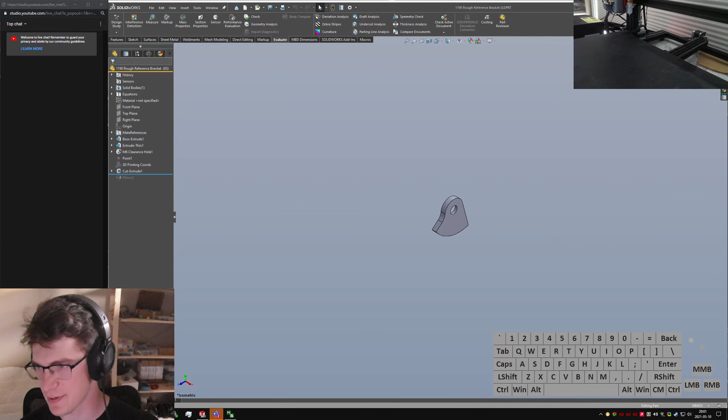What we've got today, I have. Let's add this, unfreeze this guy. We've got these.

I don't know, I'll just pull up the image because that'll be way easier. And Teams is just gonna be pinging off the walls all night. Not much to be done about that.

So, 1190 TrueTech GPS bracket. This guy looks pretty good, looks pretty sharpish, and it is, in many ways and in many respects. But it's really hard to have something that sits nicely on just a cylinder, that's all you've got to grab onto. So unless you're trying to sit flat against these faces, which by the way are not coplanar, you don't really have an easy way to control where your angle sits.

I'm designing pretty much, I'm just gonna wing this one, really. I've got this rough reference bracket file, and I'm definitely gonna save it as a new one. It's the 1190 detented GPS bracket, and it's gonna be.

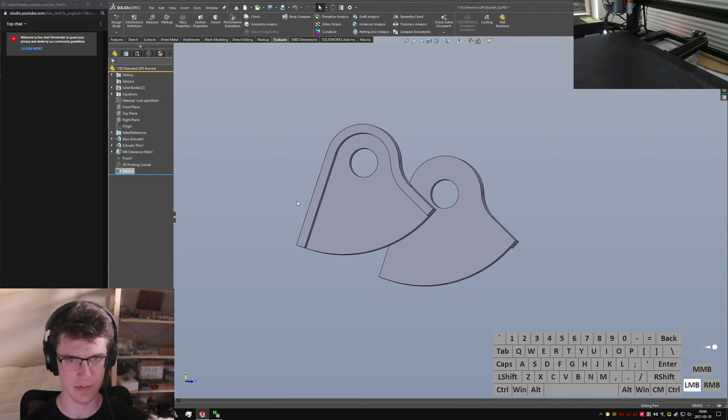So we got these two guys, which means we got a profile that we can extrude between, and I have to think about, let's see, which way's forward? So what do I get for immediately closing? Okay, so the swoop out is forward, which means this is the correct orientation, which is good.

So we want roughly, let's see.

So many messages, hope we just mute them.

Okay, so let's walk this back a little bit. We need to start from pretty bare bones, and I don't know why I have mate references on here. That's dumb. We've got this boss extrude, which is going the wrong direction. Ooh, I see, now we've got that guy too. So we're gonna make that one construction. Oh, which way do I think is forward? Exit sketch and rebuild anyway.

We'll let that error be an error. Of course, I immediately close the window. So we've got this guy, and clearly this is the dash pointing out this way, out forward and out of the screen. So the swoopy bit is forward, which I think, now that I've broken the model, I want to say it was 3 mils thick, so.

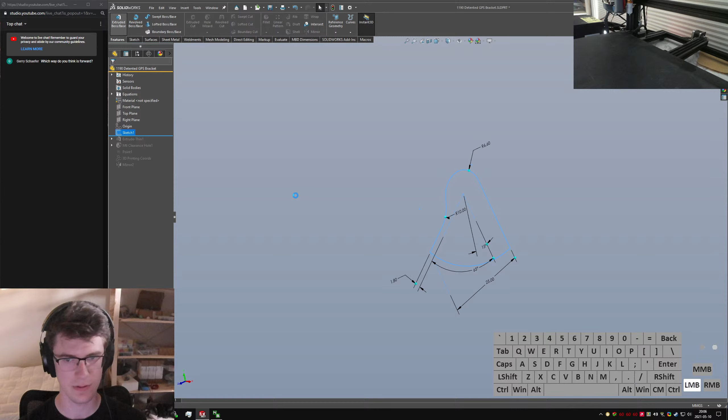Oh, it doesn't want to be a thin extrude now, that's kind of rude. Can I keep that line not construction and still have it be a thin extrude? Thin feature, one direction, selected contours, clear selections. I don't get the selection manager, which is rude.

Oh, sorry, yeah. Let me undo a couple of things here so that we have a part again.

The dash does point backwards towards the rider, but because of the way that I'm modeling it and because I'm kind of lazy, forward is towards this corner of the screen. So I'm considering the front as the side that I'm facing towards, even if it's facing backwards, because I don't know, that's the way I modeled it. I could certainly model it the other way around, but then anytime I hit Control 1 to go to the front, I would be looking at the back side of the part that I actually care about. So it's, I don't know, a mental convenience thing.

So yeah, forwards is backwards. I make a point to model my components in such a way that when you hit Control 7, you end up with the part sitting in front of you, like you would hold it if you were looking at it from an isometric perspective, which just makes things easier for having brain farts on your stream. It just makes it easier to hit Control 7, go to your isometric perspective, and get it as you would hold it in your hands.

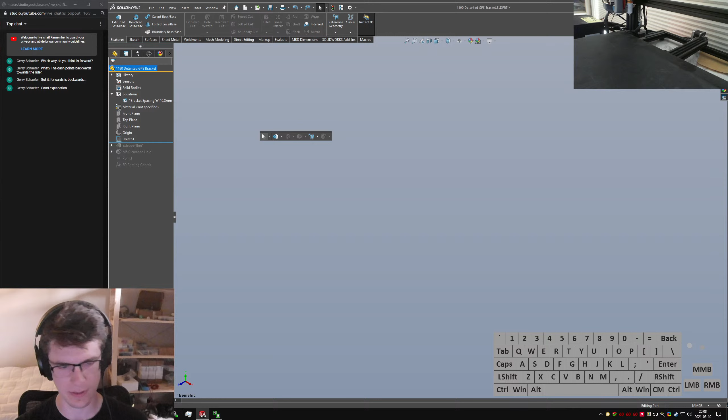So I'm going to do this with planes. I'm going to do this the right way. We'll start with an offset on the right plane in the other direction.

We're going to make this equal to, well, we'll say 10 for now. But then I can click on the plane and it'll show me the dimension, and then I can say equals, down arrow once, right arrow, get to my global variables, bracket spacing over 2. Rebuild, and now it ends up where I want it.

I can bring the sketch down below, edit sketch plane, and say I want this on my, well, it'll be the left side of the bike interface plane.

I have to be offset from this guy for interfacing with a bracket, so I should probably do that first. This sketch is going to be our outer capture, so exit sketch, and this guy gets to be a thin extrude now.

Say 2 mils is probably fine. 3 millimeters thick, other direction. Hide that plane. Cool. There's our first surface.

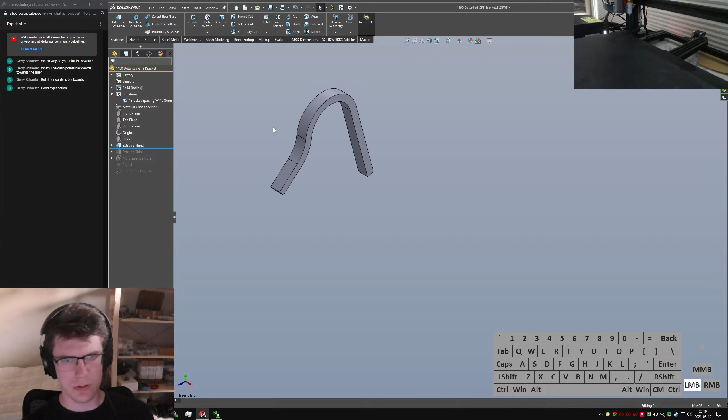I think I'm going to do this probably the first half, roughly. And I have to think about how wide I want the center part to be.

So let's do a plane. We're going to use our first plane as a reference. Let's bring it in, say, 20 millimeters for now. And we'll figure out exactly how much we want that to be later.

Ooh, I just realized I want a squared surface in the back of this guy. I'm going to do that with a second extrude. Even though it's not perfect, it is something that I want really in context, so.

Whoops. Whoop. Oh, jeez. Okay, let's add some dimensions here.

60, and collinear. Make these guys equal. Well, equal's not as good. Tangent to the line is better.

So exit sketch. Yep, close the sketch that way. And now we're gonna go other direction, up to surface.

Well, better than doing up to surface, in case the surface changes later, I can do D1 at extrude 1. Or, hang on. Boss extrude 1?

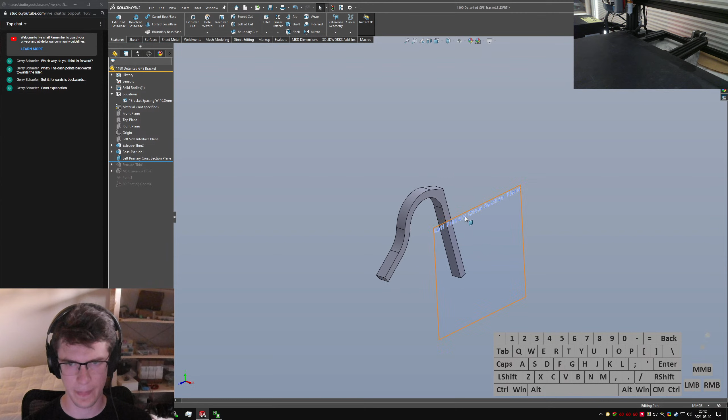Let's just sketch on it. And we'll show this sketch so I got something to work with. And we'll hide the body too, so I only have the sketch.

But that's not going to work because I care about interfacing with the body, not the sketch, so... And the sketch is actually easy to guess too, so I can hide that.

So we'll convert this guy, trim all that stuff out of the middle there.

Let's do kind of this guy. Call that tangent down there. Draw this line up here.

And we're going to trim all this stuff off too, because we don't want that in our finished profile.

This, okay, I thought that said it was fully constrained for a sec, which seemed weird. Parallel, cool. Now I have...

I don't know how I'm going to make that come in cleanly, but we're going to figure it out.

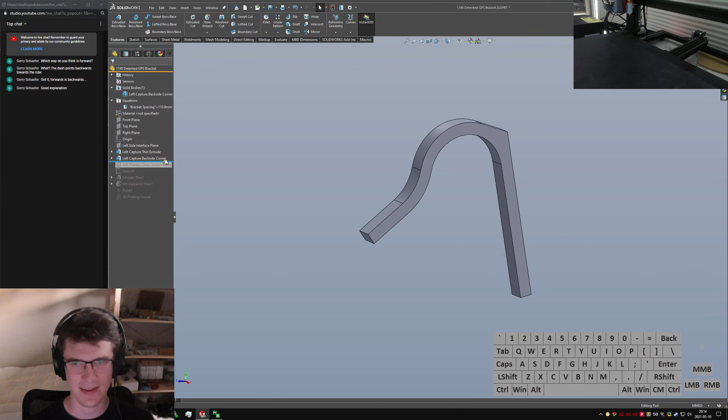And now we'll add another sketch on this interface plane. We're just going to straight up convert that guy and then make myself a profile to extrude from, or extrude up to rather, when I loft.

So now I've got that profile. Those match up well enough. Yeah, okay. I think I can swing this.

So let's hide this plane. Whoops, I hit the sketch, not the plane. I'm gonna do loft the boss from this guy over to this guy.

Ooh, that's actually not bad. I like that contour. It's not perfect, it definitely needs some kind of regularization, but let's just do a normal profile and see where that gets us.

Ooh. Yeah. Fan of that. Okay. That gets us partway there.

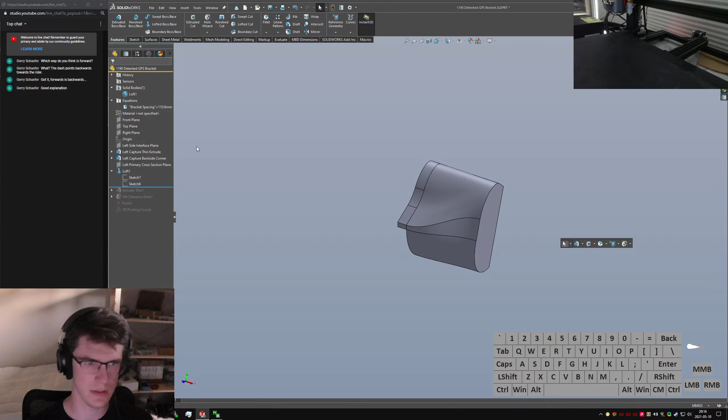I don't know what we're listening to now. The Trip by Still Corners. I'm gonna skip it and just start a radio based on something else.

Because I can, and nobody can stop me. This is If You Can't Vibe with the Peter Criss Jazz, You Must Be... I think the rest of the song title is crazy, but it's like a 15-word song title because that's math rock, so...

Let's try a quick mirror about the right plane. Bodies to mirror, just this one. What? Oh, merge solids. If you leave that checked, then it throws a fit. I'll probably have to chamfer that backside or something at the end, but not now.

Ooh, I should fill the inside of that too, just a little bit. It's gonna happen early enough that I'm okay with doing it. Well, no, I'll save it, because having those hard surfaces in there could be handy. It's easier than referencing the sketch too, so.

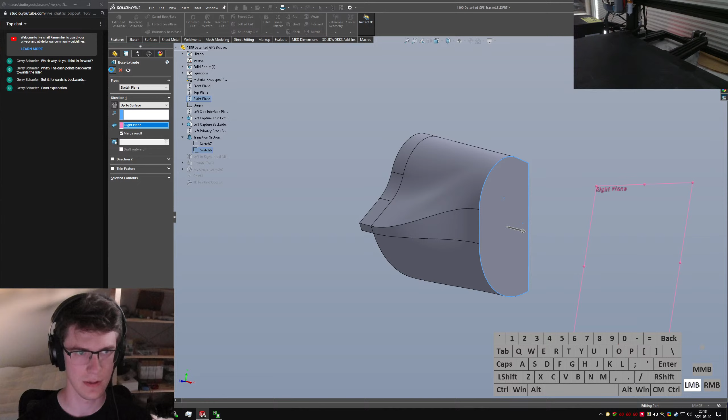This is the transition section. This is the left to right initial mirror. And I think what I want to do, actually, is extrude... whoops. Let's grab this sketch here, and we'll say up to surface and right plane. Merge result. And then we can just, the mirror will stitch that all together for us.

Oh, whoops. Hang on, I changed the boss extrude instead of the mirror. Whoops. Bodies to mirror, merge solids. Cool, cool, cool, cool, cool.

This is the left to center extrude. And we'll just delete all these extra features and get those out of the way. Especially because those 3D printing coordinates are no longer going to be useful because we're not printing the back of a tiny coupon anymore, we're printing a pretty big piece.

Should get some calipers out. This is the part where I have to guess how wide I want the core to be, because we have to have sort of a detent section in the middle.

Pull up the old bracket. Or no, it was rough crossbeam. Here we go. Once SolidWorks decides it wants to load it. I think I'm going to go for maybe a 40mm wide section in the middle. That seems fine.

Ooh, No One Cares, Via Luna. Great song. It's got a later on riff that's just... it's excellent.

Okay, so... rough cross. Hope it loads. Or is it just going to also crash a second time? Maybe it's just going to crash a second time. That would be kind of disappointing but unsurprising.

Man, that sucks. Because I already had the whole concept kind of mocked up, so... saved me some thinking. Oh well.

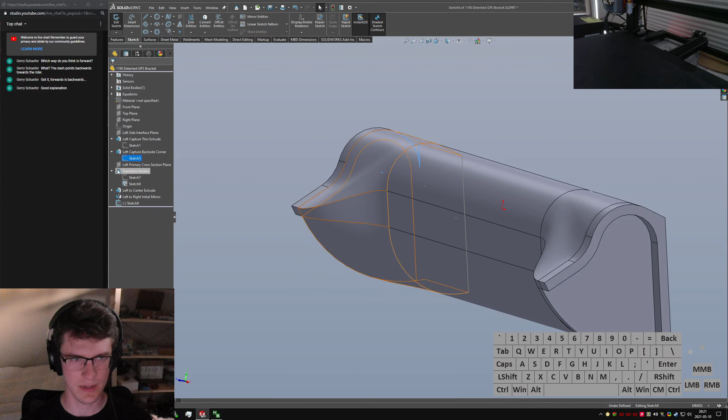Well, hang on. No, because I have... one of these lines is good, one of these sets of lines. We'll just convert all these.

Then hide the body and think about it for a sec. Hiding the body, very important. How else are you going to get away with doing SolidWorks?

Extend that, which brings us back. And then, doink, just trim that right off. Well, whoops, hang on. Trim tool, get rid of all that.

Then I have to decide... I think I definitely want this to be full round, so we'll pick this edge up here and make this tangent, and then when I add clearances later, I'll just have to remember to add that. Got it. 200-pound gorilla, I will design for that much prevention of shaky silliness.

Oops, I forgot I need to add my detent down at the bottom. Let's do... it's going to be a mid-plane extrude anyway, so we know that much. 80 mils of clearance. Oh, whoops.

Rebuild errors. Here's a fun thing that I didn't know until fairly recently. If you don't have a body shown when you run an operation, it'll just assume that it doesn't want you to cut there. So, operation failed due to geometric condition. That's weird. Why is it failing?

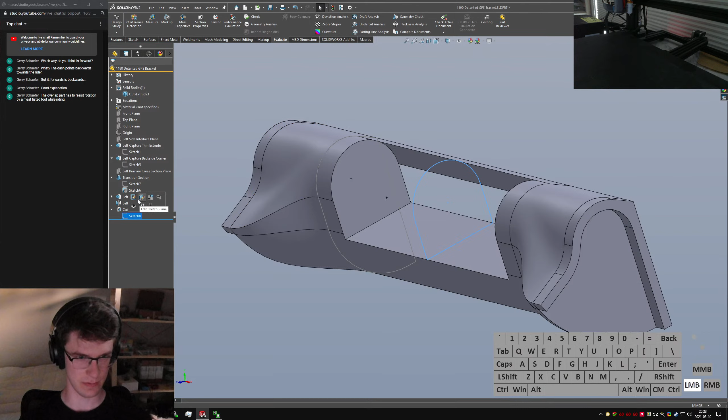So we're gonna undo that. Trim, get rid of that. Trim that guy, and convert these. And then I can add back this tangency feature, or I can add back this tangency feature.

Oh, hang on, why is that not defined now? Oh, it's no longer horizontal. Oh, it needs to be perpendicular to something, so I'll make it perpendicular to this guy. But at the same time, I kind of need these guys to be further away so that I can extend further into this sort of cutaway section. I guess? Do I?

It'll have a face beyond the bracket, yeah. I think that's what you're referring to. I have a measurement of the bracket thickness, actually—3.5 mil.

So this actually needs to be a little further, so good thing I checked that. Or good thing you called me out on it. Let's do that, come over here.

The blue ones are feature dimensions, so things that apply to the feature rather than the sketch that it's pulled from. So you can click those, and everything breaks suddenly, which is very cool.

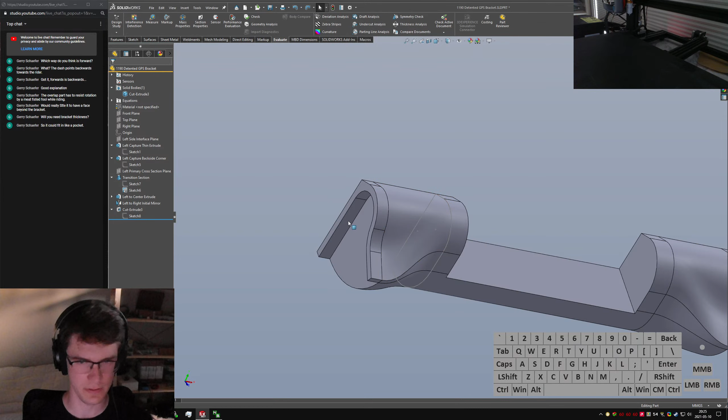Oh, it made a different one. This one suddenly decided it didn't want to merge. Why didn't it merge? Oh, rebuilds and it works just fine. Figures.

I'm going to come into this cut extrude sketch, and I'll select chain, deselect the one at the bottom, and then offset entities. Don't select chain up here, because I just want the one that I've selected. Cap ends with lines, construction geometry only on the base, and then make this like 50 mils. So now I can make this as large as I want, and it's tied to my existing geometry.

Oh, you want it to have the end capped as well, right? I'm guessing that's what you mean. That shouldn't be too difficult. I will have to probably make a little cutout here so that it can come out just fine, but that's just adding a cap.

And that should print pretty well too, which will be nice. But I do want that to have— ooh, how thick is this actually? Only 2 mils? Let's put that up to 3.

So we'll come over here to this sort of inconspicuous dimension, make that a little bit thicker. Oh, goodness. Why did that work just fine with 2 and then not with 3?

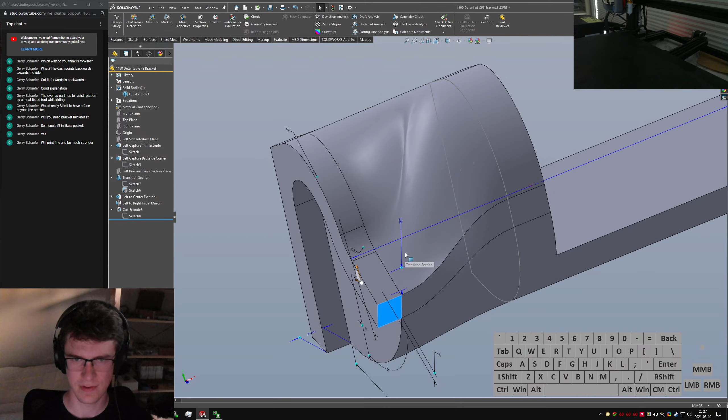I should draw some guidelines here, so— what, with the weird kind of butt crack? I try to avoid drawing butt cracks in my parts where possible. Oh, it does look kind of cool.

I probably should add the caps before we do the mirror. So we're gonna go all the way back to this, where we've got the corner. We're gonna do an extrude. I'm just gonna have to straight select the face, which isn't great, but it is what it is.

So we'll trim that up. Let's do something kind of like this. So we're gonna trim this guy. I want this to be coincident with that line so that it's sort of tangent up there.

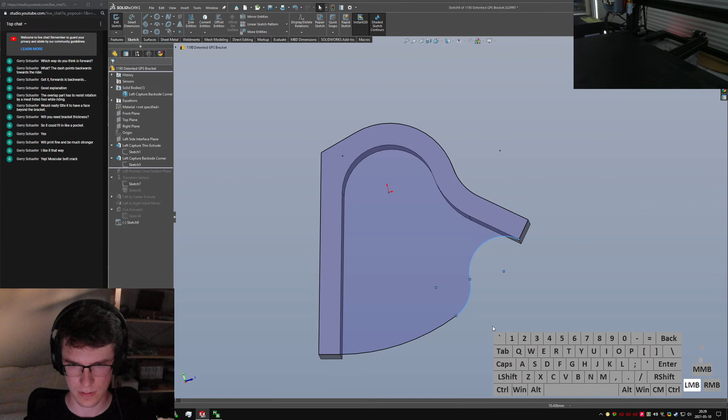Cool, that looks fine. We'll call this maybe 4 mils, and that'll give us clearance for the metal bending out there, or should.

And we're gonna make this equal to D1 at left capture, then extrude, which I'm just gonna take a wild guess and say is probably the right thickness. Yeah, it is. Cool, now we got a pocket. I hope that fits. I don't think it should have any issues with fitting.

Can I chamfer this safely, like when it comes down to it later on? Oh wow, yeah, probably don't even need anywhere near that much, but if we make it maybe 4. Cool.

Just for, you know, now I have to check this. We'll make these 0.4.

Yeah, that's very doable. That'll clean up real nice, I think. I'm not going to do those chamfers and fillets just yet, though. So let's shrink our tree down a little here, clean it up.

So we've got this guy. We're going to hide that sketch. And now I have to start thinking about the mechanism in the middle here, which I haven't fully fleshed out in my head yet.

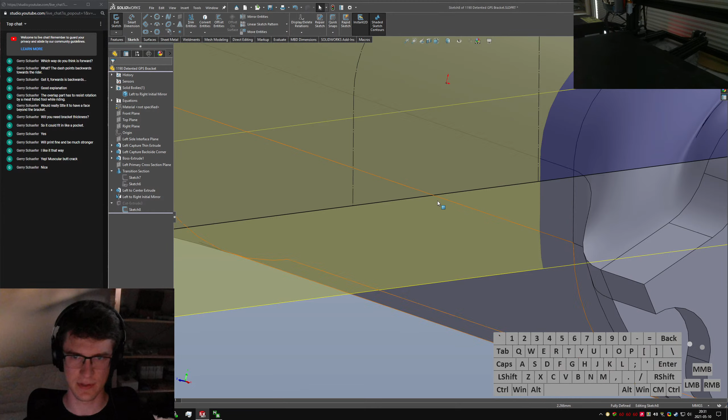So initially I had a semicircular sort of captive thing to prevent the two bosses from rotating at the bottom here. But it occurs to me that I don't really need that because those flats should keep it from rotating too much. But I still kind of want them there, so I think I'm going to add it anyway, just to guarantee these things will not flop around.

So we'll pick these two guys, make them equal, make this 2.5 - that's fine for now. We'll get the clearances later.

Oh, we do need to go all the way through. Let's do that right before the mirror. Hole wizard. Did I save what diameter that hole was? 6 mil, okay. I'll do hole wizard, probably M6 for normal clearance.

Hey, check that out, all already set up. Right on the origin, through the whole part. Mirror, cut, extrude, easy peasy. Almost like I knew what I was doing.

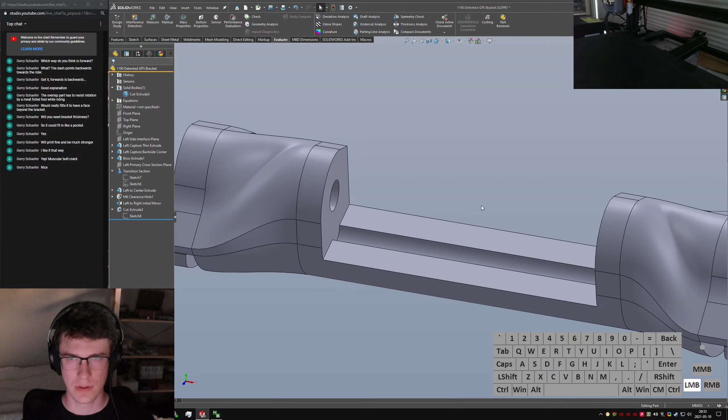Okay, so this is 9.6 millimeters, which is kind of a weird size. What is that based on? Is that based on... because it's 3 millimeters in radius larger than... yeah, okay, whatever number in there.

So now... ooh, I could have this be round, actually. That would be kind of cool. Nope, I could not. I could not do that. Because if it was round...

Oh, here, let me do a right side cross-section here. If this was round up here, then it would be really difficult to make it so that it curves and gets out of the way of the motorcycle bracket, or the GPS bracket, which I should probably just go design right now, so that I have it and can start thinking about this in an assembly context.

So, features, extruded boss, top plane. This is going to be a rectangle with fillets, so... center rectangle.

I'm going to do this with my centers first, so I know that we're doing an AMPS hole pattern - 38 millimeters side to side, 30 millimeters vertical, I think.

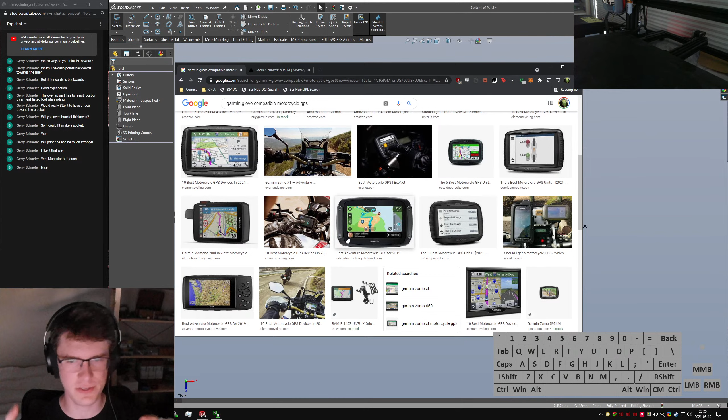Ooh, shiny new GPSs. Adventure, Stamina, and Anger - good song by This Town Needs Guns.

Okay, so it's a Zumo. Zumo 9 something, it's like a 930. I think it is a Zumo 930. A whole bunch of juice, apparently, is also named Zumo.

I'm just going to assume that it's horizontal, and then if it isn't horizontal, I will fix it later. Because we can always reprint this part. It's just 2 numbers, so...

Oop, I made these construction too soon. I need to have them be not construction, so that I can offset...

Centimeter? That seems fine. AMPS hole size - I want to say it was M3.

Okay, these numbers are in inches, so 0.2... wait, oh, is that the outer radius? Okay, hole radius, or hole diameter is 220, so 0.220 inches in millimeters. Zumo 660. Okay.

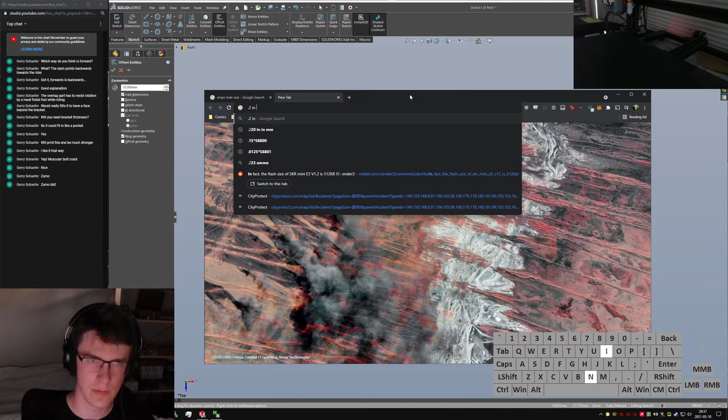Well, that's 0.220 inches is 5.6, which I'm happy calling that M5. So we'll design this for M5 holes. And this one says 0.2, so 0.2 inches in millimeters, 5 millimeters. Yeah, those are M5 holes.

And I'm not going to dimension each fillet. Let's add all these guys here. See, that is D3 at sketch 1, so I'm going to set this guy equal to D3 at sketch 1.

Easier than... I mean, I could link them. I should link them. Okay, right click, link values.

AMPS mount oversize. Okay, that seems fine. And we're going to call this 6 mil thick. Seems fine. Extruded boss.

I'm going to be designing this one mostly in printed orientation rather than use orientation, because when it sits on a table, it's going to sit there in print orientation. Whoops.

Okay, so we've got our overall thingamajig here. That's... or 665.

Yeah, those were the two that were glove compatible, if I recall correctly. Get rid of those. And this was 19.6? Nope, that's radius - 19.6 over 2. There we go.

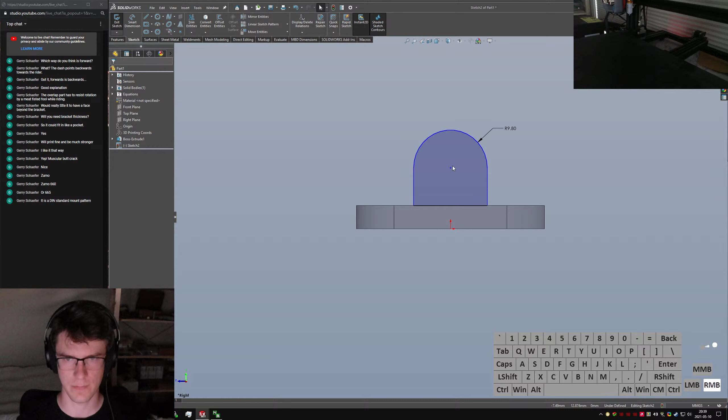So, I've spent multiple hours Googling that. I can't find a DIN standard for that thing anywhere. It's called AMPS, which I know for sure, but I cannot find any information about what the actual standard is. It's not in VESA or anything. DIN standard GPS mount - actually, I bet I'm going to make myself look like an idiot. DIN standard AMPS GPS mount. Yeah, I looked all over. I couldn't find a DIN standard for it. Maybe I just suck - like that's always a possibility.

Oh, Mirror House, Via Luna, also a good song. I'm gonna do.

Well, yeah, we found a standard, but it's just called AMPS - as near as I can tell, it's like advanced mobile or advanced mounting pattern, something. It's like a generally accepted standard, but I couldn't find an actual standard document for it. It's just a thing that everyone said they were all going to do, and then they did.

It works, it's just very strange. So, through all... well, oh no, I don't want to do a through-all. I want to do a midplane, because this has to fit in between. So let's... whoops, hang on, hole wizard.

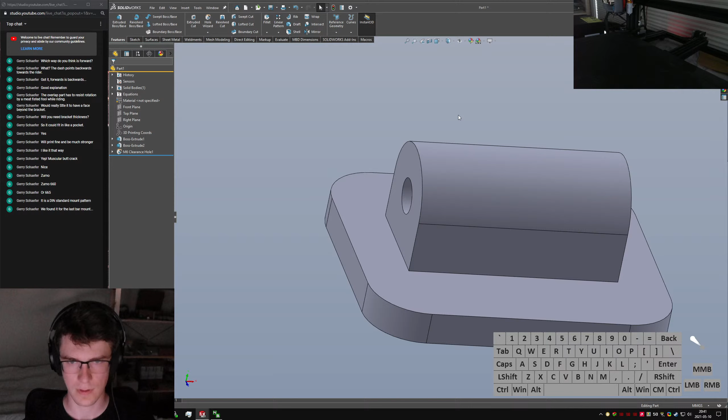If you mouse over the edge, you get center line. And we're still on M6, so we're nice and all good in that regard. Oh, I need to come down here and do the hole pattern. Oops, hole wizard.

So now we're doing M5s pattern, and we're gonna go with this boss extrude. Show the sketch on here, and then we can just click our existing four corners. Lines right up.

And now if I change that in the future, like if I go in here and say this is 30 now, this is 38 now, it just goes to the right spot. Let's change that back.

Oh, M4 fasteners, based on manual. Okay, sure. Yeah, I can see it maybe being a little bit loose or something, so better to have it be on the board. And we can always drill them out, so. And the pattern is flat, right, on the backside, I think.

Let's add some fillets, so I'm gonna have to cut into them. Let's clear selections and see if I can't select the loop. Your other loop. There we go. Flat on back, okay, that's good.

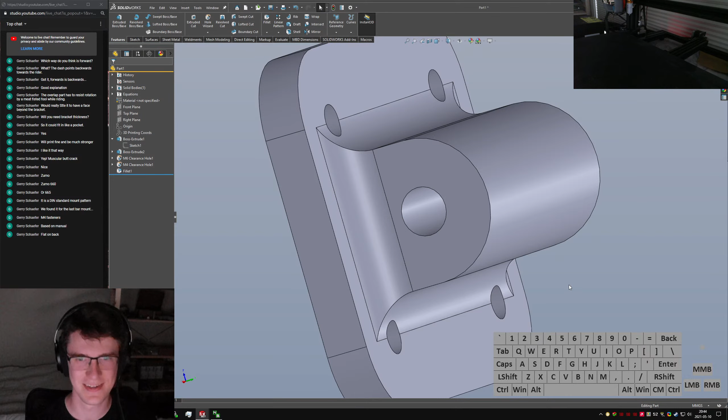yet, and we'll chamfer that after the fact. Well, do the chamfer now, why not? Ooh, hang on, that won't work. Whoops. Can I do an edge keep-away? I've never actually tried that. Partial edge... ooh, setback parameters.

I think I'm just gonna have to do extruded cuts on both sides to clear that area out. Ooh, no, I just can't even do it on that side, actually. I straight up cannot fillet there, because those have to be flat faces to interface with them nicely.

I mean, I can do tiny fillets down here, like maybe 0.4. And I can make this less jacked up. That's way jacked up. Keep edge, keep surface, please. Or don't.

I'll shrink these down a little. Holes are 30 and 38, centered on center. Okay, yeah, I did find that. I could confirm that, but it was really hard to confirm anything else.

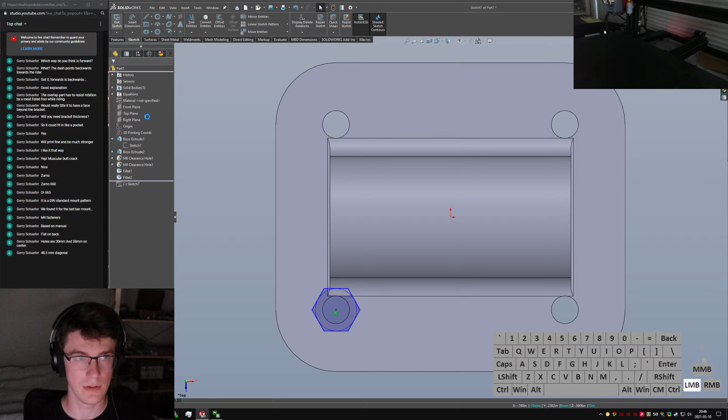Exit sketch here quickly. Come on, let me exit the sketch, please. Center to center, yep, 48.3. Hang on, why is that saying?

Oh, what is it doing? Oh, it did point to point. Center to center, 30, 38, 48.4. That's well within tolerances.

Here's the part of the show where Clark forgets nut diameter. Width across flats, 7 mils. Cool.

Oh, we're still on the sketch. Cool, call this guy 7. Cut out for the main bar fasteners. I'm not sure which ones you're referring to. You mean the one through the side?

Get this squared away. Offset, and totally forgot - okay, 3.2 millimeter thickness, so we want to go at least that far in. Draft outward, 5 degrees.

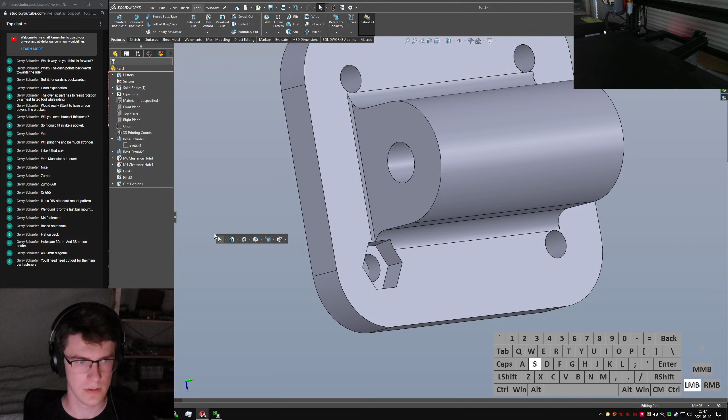Sketch-driven pattern. Selections - you can pick up the one from the hole pattern earlier. And then grab the feature. Reference point centroid. Hey, cool, went to the right spot. Yeah, there we go.

Oh, hang on, message. Oh, okay. Nothing super important, thank goodness. Maybe I want a little more space on the backside here. That wouldn't be too hard.

No tangent. Get up a little. We'll do this guy. Oh, I have to draw an extra circle here. Make that construction and co-radial. So we're going to say 3 millimeters there, and then I can have a 3 millimeter fillet all the way around the base without worrying about it.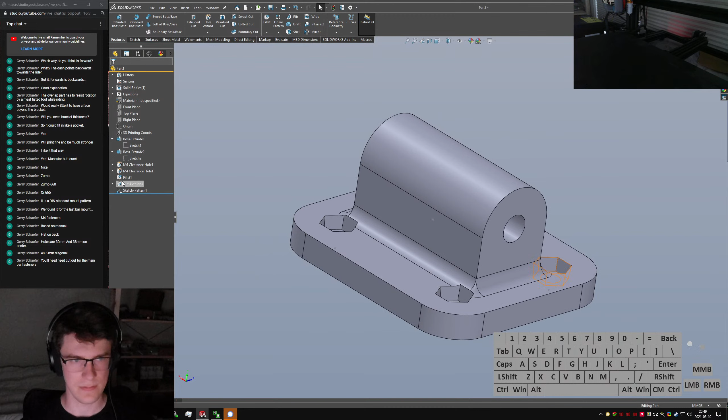Oh, but then I can do the chamfers, so I don't want those fillets. So, no round corners. Ooh, I can make this equal to that offset though, so that it's safe. So, D2, Sketch 2, come over here, double-click, D2 at Sketch 2. So then if I make this like 5, I get bigger fillets, and I know they'll always clear.

Yeah, what I'm going to do is there's going to be 2 notches, 2 little V-shaped notches in here. I have yet to determine the angle and depth, but that's something that may have to get experimented with a little bit. But, well actually, it wouldn't be that hard to do now.

Okay, I have to figure out what I want kind of the natural position to be. Plane, front plane, we want angle 20. Oops, we need a second reference, which is right plane, has to be perpendicular. Oh, 2 planes should have a mid-plane constraint. Bite me.

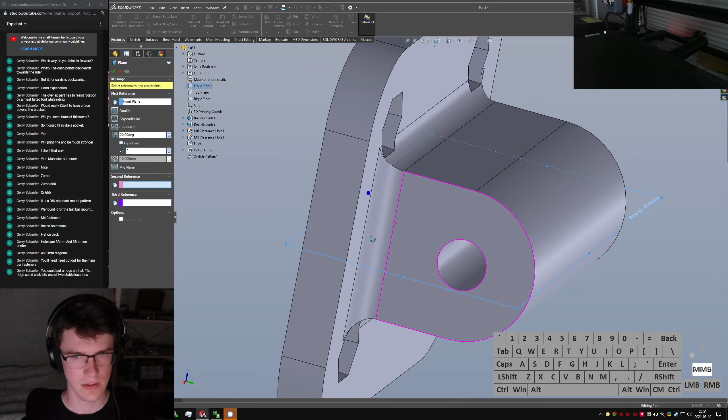Plane within that. Oh, I have to have a line. Axis. There we go. Now I have my...

Let's name some stuff for a second. Base plate. Hinged mount. M6 through hole. M4 amps mount hole. And hinge mount fillets. Hinge mount, this is the M4 nut cutout and the M4 nut cutout pattern. This is the hinge axis. So these are amps fastener pattern. And there we go, okay, that's all sorted. And we'll call this the amps hinge component.

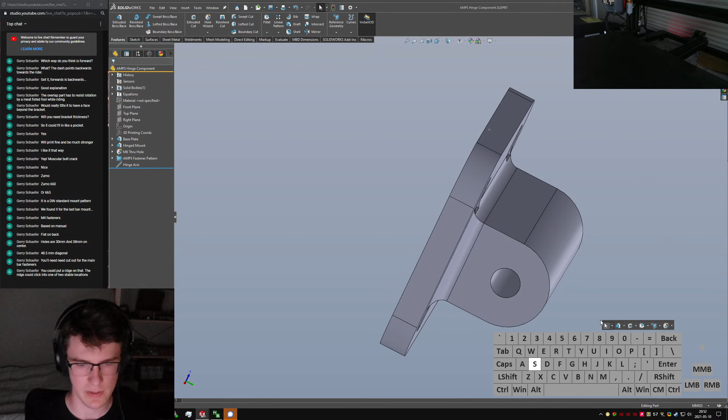Okay, so now I need a plane. It needs to have the hinge axis, and I need to have it at kind of an angle relative to the front. Well, relative to the top, actually. That seems like kind of a normal guess, and then we'll come maybe 45 degrees upward for the next one. That seems fine.

Yeah, that's... If I had this rough crossbeam working, like it's impossible to see on my screen, but I did have that as a feature. It just wasn't quite as well developed, the concept. Almost 90 degrees. Okay, oh that's right, because you're trying to avoid glare too.

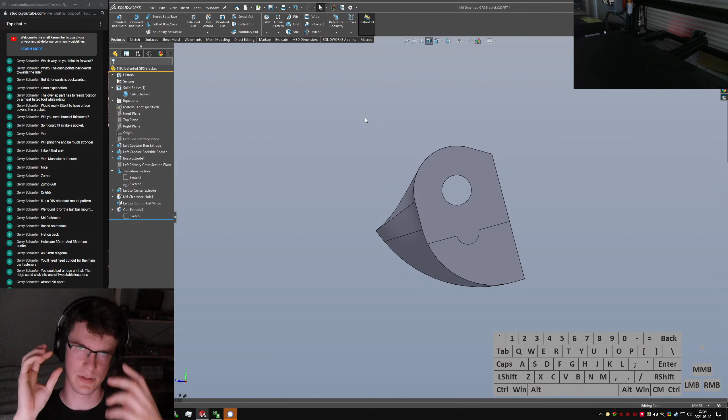So I'm going to want the... over on this side, this is roughly... are you going to want the first face to be kind of almost directly vertical, you think? Because then I'd want the first, hang on, I'd want the first, which one of my hands is vertical here? Almost 90 degrees apart, I'll do like 80 degrees. I'm just trying to make sure that all works out in my head so that when I draw it up, and well, once I have it in an assembly it'll be a lot easier to tell, but I should probably just work on that.

Okay, vertical or nearly so, flat first, and then it'll come up most of the way for the other position. So this actually looks about right. Except I want it not in that orientation, I want it 110 degrees out.

Sketch, not sketch-driven pattern, sketch please. And then hit N for normal. Let's convert this guy, and we'll do... let's see, I think it's one edge first. Okay, we're adding construction lines from the corners. Oh whoops, did it in the wrong orientation first.

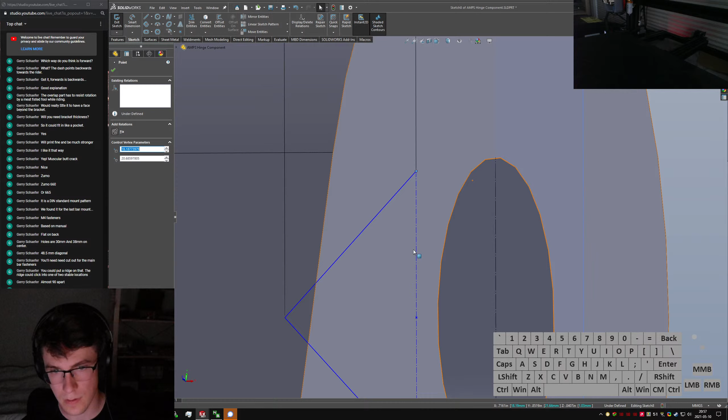That line, do need this line. Let's see, these guys are equal, which is good. Select midpoint, make this guy, make that the midpoint. 110... nope, can't be wider than... let's stick with 90 for now.

So now we can do an extruded cut. Ooh, we can't just yet, have to mirror this first. And this guy can get hidden, it's kind of annoying, and that axis too. And mirror, exit sketch, okay.

Extruded cut. Mid-plane. 20 mils. I wish I could extrude up to just this surface, that would be kind of nice.

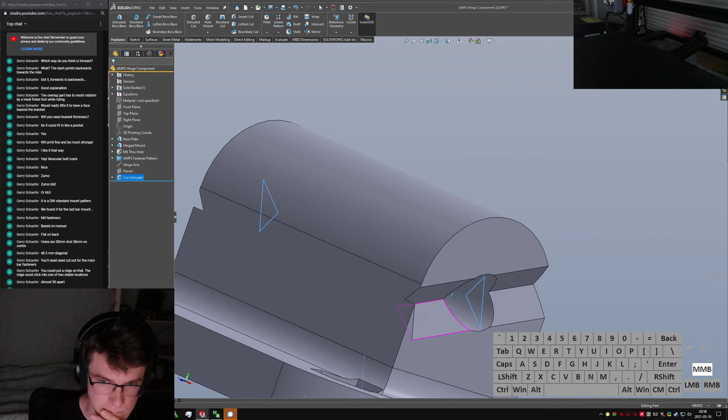Let's try maybe 25. I should extrude by exactly twice the distance from the center from here to here. So if I come back up here to the hinge mount and add a dimension of 12.8, D3 at sketch 2, it's construction, it's fine. We can come up here and say equals D3 at sketch 2 times 2.

Let's see, rebuild that. Then circular pattern, direction, this guy, instance spacing. We only want 2 instances. We want them 80 degrees. 80 degrees is probably fine.

Features, just this guy. Though it's going 80 degrees in the wrong direction. Oh, that looks real ugly. So...

Oh, goodness, let's take it back. I only have to take it back the maximum size of these fillets, so how was I determining that? I think it was another thing in Sketch 2.

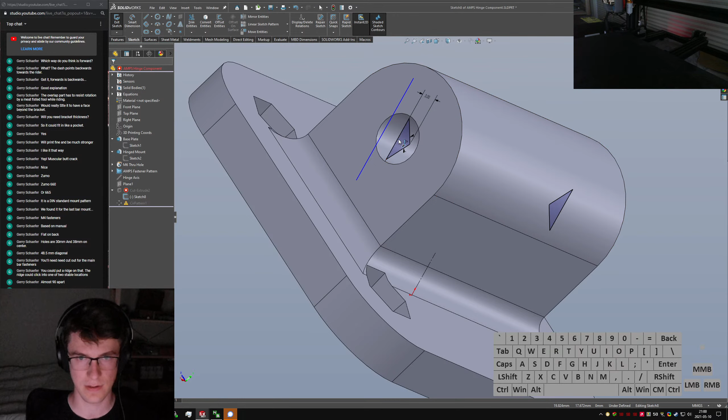Cancel. Screw it. Exit sketch, rebuild anyway, don't care. It is D2 at sketch 2, that's how far out I have to offset that. So make this guy construction, extend, midpoint or equal length, that's fine. I've already close enough to have accounted for that, kind of.

Equals D2 at sketch 2. Did it get rid of my... it did get rid of my equal length. Why is that not constrained anymore?

Oh, I see. The line is no longer coincident with my other lines, so if I make it coincident again, it lines right back up. That looks extra gross, though.

Let's see, can I just delete face? Oops, come on, get that one in there. Delete and patch. Yeah! That is exactly what I was looking for.

Oop, didn't get mirrored though. Whoops. Oh, goodness, that's not hard to fix though. Just select the polygon again and mirror.

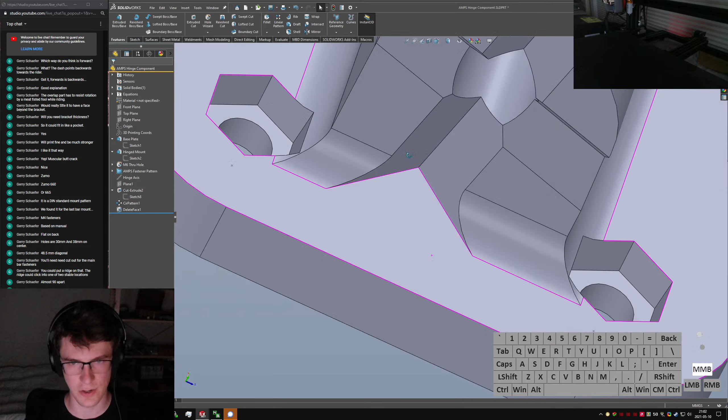Hang on. Oh wait. Oh, go away signal. Okay, so that gives you one like this, and one kind of like this, which seems pretty close to right. I don't know, I'll make two different configurations mating it later on.

So, first detent cut, second detent cut, second detent cleanup. And this is the detent sketch plane. Whoops, hang on. Pipsy. All this stuff, detent features. Amps, features.

Yeah, that's not bad. I think I just add in fillets there and that should be fine. So let's go, let's see.

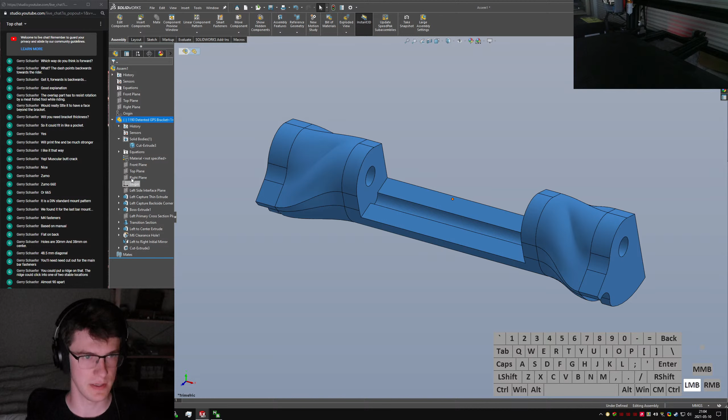Make assembly. Detented GPS bracket. Load it and make the origin, because we live in a sane world with assemblies that are constructed by sane people. And save. 1190 GPS bracket assembly.

Hinge component. So we'll just mate this right plane right on the other right plane, so they line right up. And mate that guy over there.

Hang on, I don't know why that's transparent. Yeah, that's looking pretty good. Almost like I know what I'm doing.

So we'll call this vertical position, or rather, call this down, and then add a configuration for up. And then we can mate this in two different configurations depending on what we want. So...

Pick this guy, mate that one parallel in this configuration. Oh, whoops, I did that wrong. This parallel wants to be with the other one, so we'll just configure that to be suppressed in the up configuration so that it's only active in the down configuration when the GPS is down.

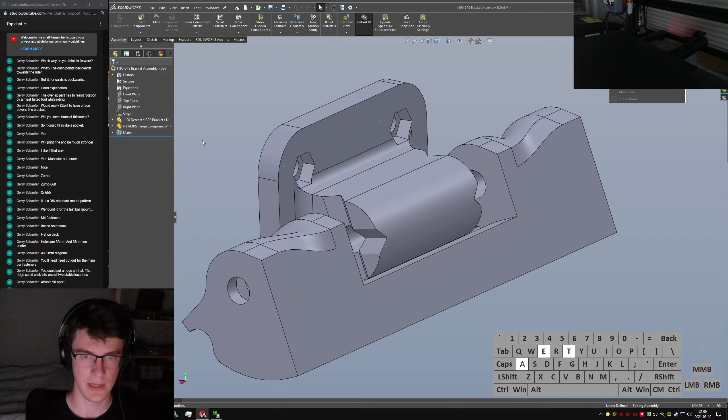Now we can come back to up and add another mate. Pick that edge and this one. Down, up, down, up. Cool.

Now how are we doing for interface down here? Is this actually parallel with the top plane? Did I manage that by accident? No, it's got 5 degrees of angle on it.

I bet this is 25 instead of 20. No, it's 15 degrees. That's fine, a little bit of tilt up I think is probably warranted.

Also, I still have an active sketch somewhere, because I've got something with points visible. I think it's, yeah, it's my amp splining sketch.

Now, before I do those detents, I would like to add a chamfer here. Okay. Detent still works just fine. Pre-detent chamfer. Make this one equal to D2 at sketch 2, like all the other fillets.

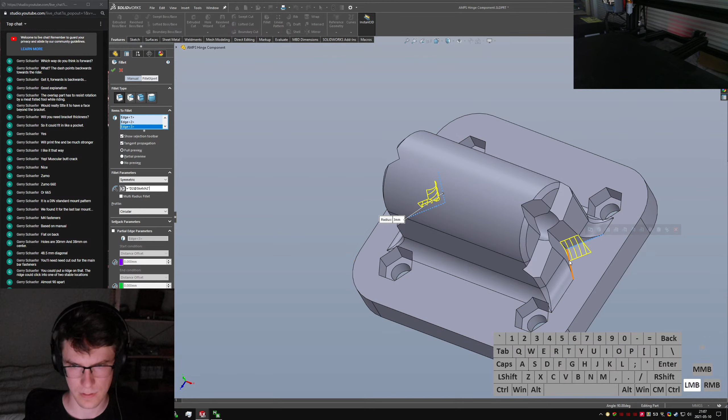That looks gross, but I'm just gonna not look at it too closely.

Okay, so we've got our pass-through, got the bracket assembly. Now we just need our little sprung pads. I think I want this a little wider too, so 40 millimeters is fine for this bit in the middle, but that only gives us 10 millimeters of length for the spacers. I would like a little more than that.

Which now is a good time to think about compression springs and what's going to fit there, because I only have springs sized for roughly M6 fasteners at the moment, since there was just a bag of them at work that it was like, hey, we need to get rid of these, do you want them? I'm like, yep, yes please.

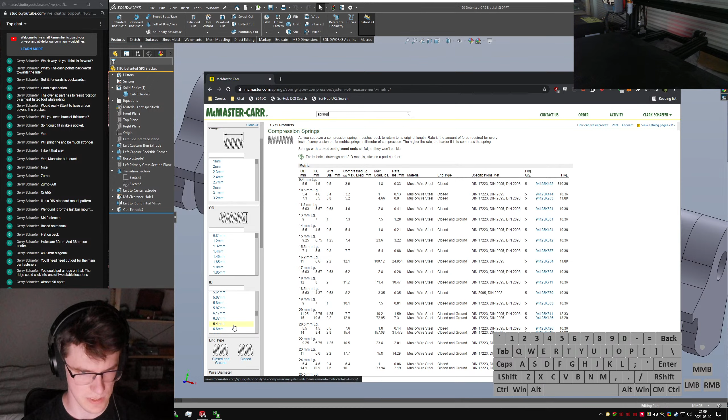Okay, ID. McMaster doesn't like it when you change the size of the page. So we want 6 and a bit ID, so we'll say probably everything from this whole range is probably fine for IDs, so we'll get everything in that size range. We want pretty short too. Corrosion resistant would be good.

Compressed length, max load is going to be... So we've got... Let's see. Wow, these ones are stiff as hell. 6.4 ID and 9.6 OD. How long are those? 9 millimeters at compressed length, 14.5. Good lord, these are stiff little buggers.

How much are these? 15 bucks for a pack of 5? Yeah, that'll give us spares to construct 1 or 2 of these, and an extra if one breaks.

That's also like crazy high pounds per millimeter. Oh, I should do some math on this. What's the twisting gonna be?

Oh, goodness, I'm just going to wing it. You know what, this is going to be what it's going to be, and we'll tune it afterwards, and we can buy more springs. And if we find that something is too weak, we can preload it, and if we can just print spacers, we can just print spacers.

My goodness. Okay, give myself some extra room in there. Come look at this. Oh, that's almost a little too far, now that I look at it. 70, maybe you want to bring the thickness of this guy back to maybe 35. Is that going to break things? Nope, doesn't break anything. Nice.

Haven't heard this song in a while.

So we've got quite a lot of extra space. Weak is probably better. Yeah, probably. We'll do 7.5 millimeters of thickness nominally, and it's not too difficult to.

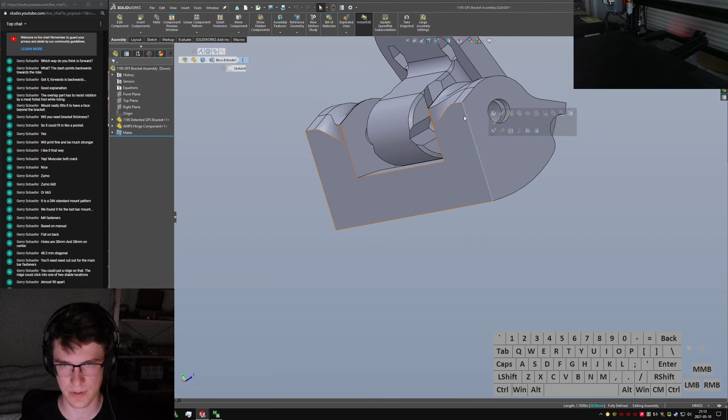Hang on, how long is this? Oh, it's not a round number. Gross. Is this a round number? No, also gross. No.

Because I really want to match this profile if I can, so. Actually, I'm just going to Control-C that and see what happens if I go into a new file and paste it. Like, just Control-C face. Sketch, right plane.

Oh, insert without sketching. Okay, so it's going to be a little tricky. But we know... Okay, we'll just do this kind of from first principles. We've got rough shapes, doing some rough shapes. And then we do kind of just a little bit of a bend inward here. And this does not, midpoint of this line does not line up with the origin, so I have to add a separate control line for that.

And this guy is tangent to that. This guy is 19.6 divided by 2. And this distance is... Hang on, how did I do that distance?

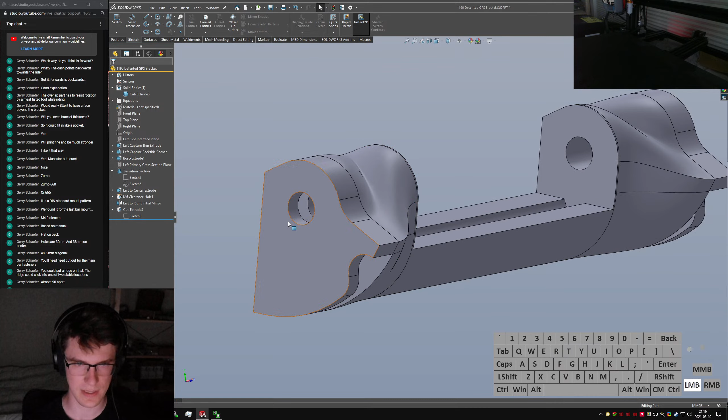How did I come up with this length here? Can I pick a different reference frame? I know there's a way to do it, it's just been a while since I've thought about it.

Let's come up and look at the initial. How long is this guy? Oh, is it not defined? Am I that guy? Oh, I just said it was 25, so this is going to be a gross number. No!

Okay, so I just have to kind of match it. Goodness, okay, 6.32, what's that in way too many digits? Which is millimeters. Millimeters. 6.32 is close enough.

Now we just have to... oh, this just needs an angle on it, and I think we're good. Nope, still doesn't want to be. Still doesn't want to say where it is. There we go, it just needed that tangent to the bottom. So now we'll get this kind of tumor-looking guy down here, and that guy is coincident with the bottom, so we'll just do that.

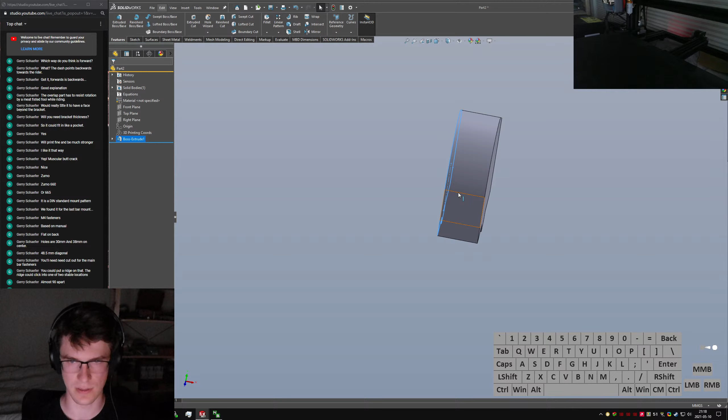Features, extrude. I'm going to extrude to the right because I'm dumb and I should be extruding the other direction. Can I just flip this? Every once in a while, I wonder if there's something weird I can do by right-clicking on dimensions, and I'm almost always wrong. So we'll go the other way.

Extruded boss. Top plane. Reconstruct our triangle from earlier. Origin, make it the midpoint, define all our characteristics as we had before. I think it was 3. And this one was also 3.

Then we need 100, I think. 100 sounds right. And then we'll do through all and through all. But we won't merge, and the reason why is because I have to trim this to exactly match the existing profile. So I'm going to do that with offset surfaces, because that lets me get really good control over it. So no offsets, just pick, whoops, not that face, just these faces.

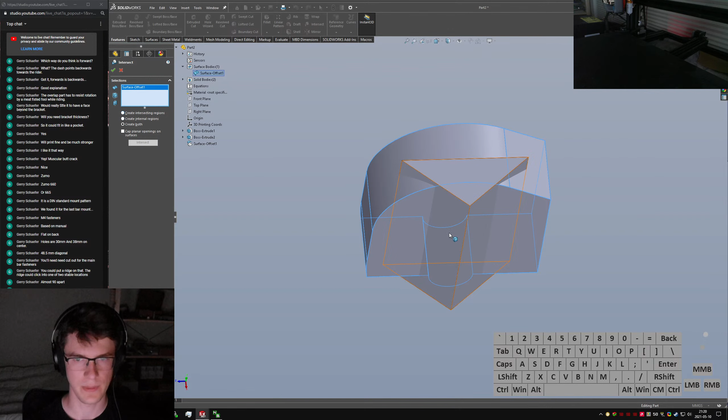Okay. Intersect. Nope, not the boss extrude, just the surface, please. And then this boss extrude. Intersect. I guess it wants me to extend that first.

Extend surface. Ooh, I'll do untrim instead, because that's a little nicer to... let's see, select open loop. We'll do 100%. And that'll go the full length, and it'll always, should always clear no matter how thick I make that, so.

Intersect. These two, intersect please. I want to keep only this region. Whoops. I was wrong. You click the ones you want to get rid of. And I want to make that consume the surface too. This little checkbox here. And then it gets rid of the surface left over.

Now, if we unhide that body from earlier, we can combine, and cool. Now we've got our little divot.

Do a hole wizard from the backside of our newly completed part. And this is going to be an M6 normal clearance as before. Mouse over our arc to get our center. And we're good. Okay. So we'll call this the detent slider. I get the feeling that these might need to be a little less slopey, but we'll find out.

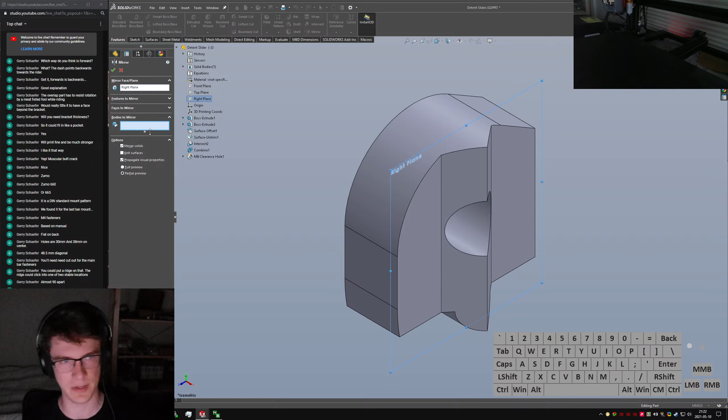So, anyway, mirror face, picking the right one just so we have something to mirror on. Bodies to mirror. Just this guy. Don't merge.

Realize that you should rename all your features. Slider base. And this is triangle detent extrude. Base perimeter surface. Base perimeter surface lengthen. And this is intersect trim triangle detent with surface. Well, it's implied with the surface because that's what intersects do. Combine, add detent to slider. That's M6 pivot hole. And then this is the mirror for -2.

Yeah, I might actually, mightn't I? I could have... I have a solution to that, but it's kind of hard to articulate. I think maybe I could have like a track that a little feature slides in so that it stays in the middle. I could only spring one side. Yeah.

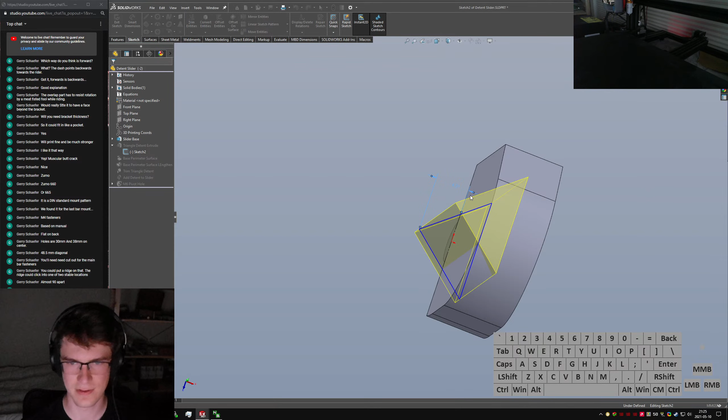Okay. Part comes out the same. Almost like I know what I'm doing. Okay, so we got the M6 pivot hole.

Slider on one side. I have to go over here, and with the detent, I can now, let's see, edit the sketch. This one's the one on the right side, which is the first one that already has dimensions on it.

So now I just trim all this off. And the cleanup feature is going to throw a fit because it doesn't have any faces to delete anymore, which is fine. That's a sacrifice I'm willing to make. And we'll get rid of these extra missing references.

And so now we have to have half of 35 one way, and some other distance the other way. Back on this guy. We can just do that with the cut extrude. So right now our midplane is 70. So instead we'll go that regular same distance one direction. And then the other direction we will go 35 over 2.

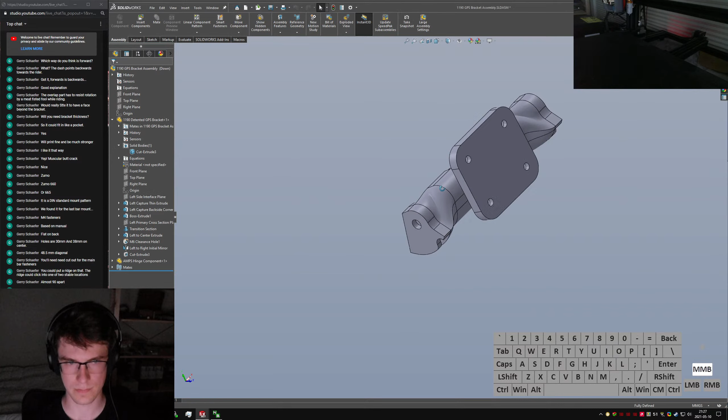Detent slider. Hang on. I should no longer have a mate on the hinge component that makes the right planes coincident, but that isn't necessarily true anymore because these parts can change width and be different and strange. So I should mate them like that so it's a little more accurate to the part, or to the finished model.

And now we add our detent slider. We're going to mate that coincident with... you don't want that. Yeah, I guess that makes sense, because if it's got the flat, then it should be fine. We'll just get rid of that.

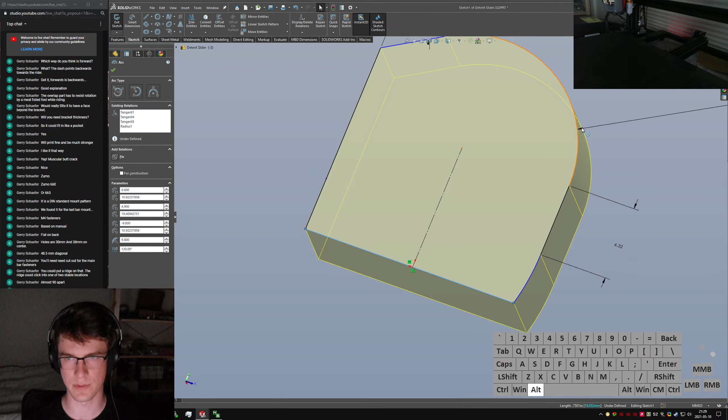So now we can do slider base, do the same thing. Delete that, bring this guy over here. Hang on, this guy never got horizontal. Oh! Got rid of the one that one was tangent to, so... whoops. Hang on, things got weird.

Oh, I see, the region's changed, so... create internal regions intersect. Oh, because it makes zero thickness geometry. I can fix that. I just need to change which surfaces I'm offsetting, so it's just the ones that intersect up top here.

Clear selections. Whoops, I only wanted to clear the ones that didn't exist anymore, but that's fine. Now the untrim only has these two edges, which is also fine. And triangle detent's normal now. Although this inexplicably thinks that it's not the same surface. They're parallel, and the normal distance is 0 to an extremely measurable degree. But it's still trying to fit. That's really annoying, but I don't think I care that much, so I'm not going to worry about it.

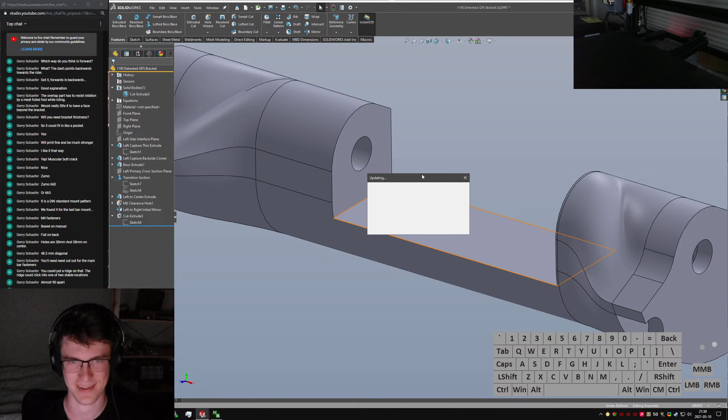Okay, now we just add these two guys and say mate. Parallel. Hang on, are these... something's not right. That's weird. What's the deal there?

Point 8, 9.6. I did a goofy somewhere. 9.6. Detent slider gets slightly smaller. Whoops. Okay, but now that all fits together.

And now we add an extra mate to control... advanced, I guess? Yeah. Width selections. Free. It's gonna tell me that's still undefined because SolidWorks is dumb. Oh, hey, hang on, this is 90 degrees, not 100 degrees.

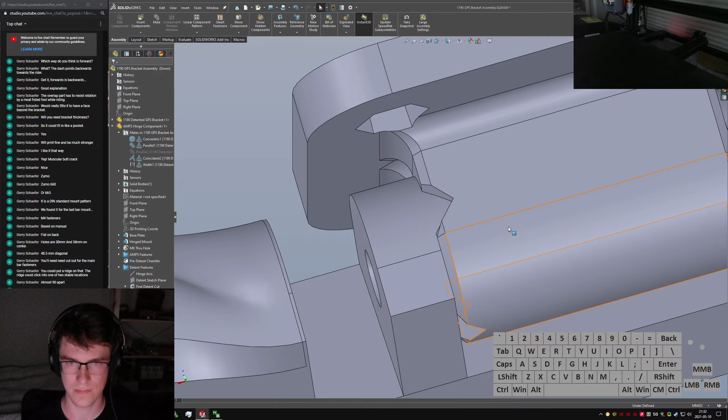Cool, okay. That is most of the way there, I think. Oh, hang on, this is no longer the -2 configuration. This is now the only configuration. So we can just call this one default now.

Mechanically simpler makes a lot more sense. And that shouldn't weeble wobble around too much.

I do wonder if I should have some sort of sheath of some kind. Let's see, this will always be able to slide down on, so I don't have to worry about it being packed all the way tight, but I do need to have some play.

Yeah, I'm just trying to think about how I want to shape that, because do I want this to be the overside and this to have like a plunger inwards that the spring impinges on? Do I want... I mean, yeah, that makes the most sense. I should probably just do that.

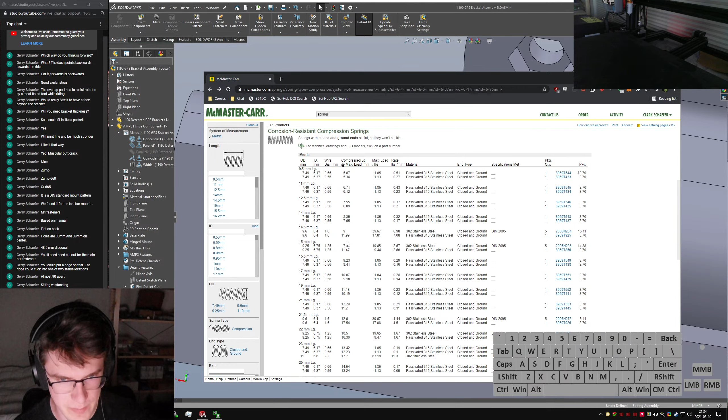Let's see, what were those McMaster spring options? Plenty of things. Let's see. Compressed lengths, lots of compressed lengths around 10. And lots of max lengths. Looks like we have lots of options with about 5mm travel, which just seems good.

Oh man, I've been ignoring a lot of messages.

Which, it turns out, is fine, so... yeah, that makes sense. Oh, you mean the whole slider in the tunnel? That also makes sense. Okay, yeah, let's do that.

Let's say I want... let's see, what's the minimum distance between these two? Minimum distance is 6.3mm. So I can safely reduce the size of that by 3mm and be fine.

So let's leave just a little bit of clearance here on the edge, maybe 2.5mm. Let's tweak this guy first.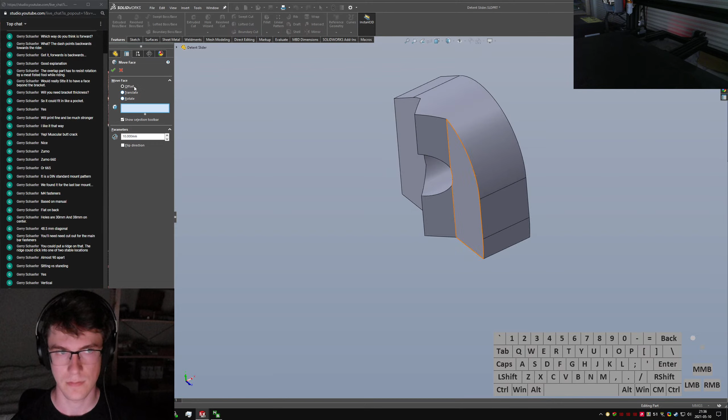Let's see, move face. That's the wrong direction, I only want them to be about 3mm smaller. Oh hey, that's not right. I didn't tell you to move that face.

Yes, this is a very good idea, and I like it a lot. This is going to look very, very slick.

Extruded boss on this, just convert. Trim, say yes, thin feature, one direction, wrong direction.

Don't listen to One Direction. They're not a good band.

16. Oh, not 32, just 3, please. Why would it result in 0 thickness geometry?

Oh, wait, fine. Control A, offset, reverse. Oh, because it would make a 0 thickness down here. Yeah, I can see that. Do not make any construction. And I think...

Let's see, this guy needs to poof. This guy needs to get longer.

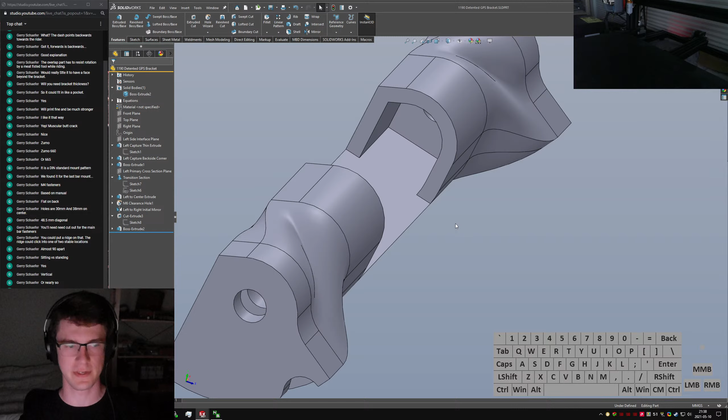Needs a little more clearance, I think, but I should probably take that out on this side because the slider is getting kind of small. So we'll call this maybe... Well, I'm going to keep it nominal and fix the tolerances later. This is going to be among the neatest brackets anyone's ever used, which is definitely not a gross overstatement of my skill.

So let's come do some finishing features on this guy. We're gonna do very small fillets, probably come up before the hole, and add some fillets here. Make them pretty small, make them really small actually. Detent fillets. Chamfers now. Skip this. Never mind.

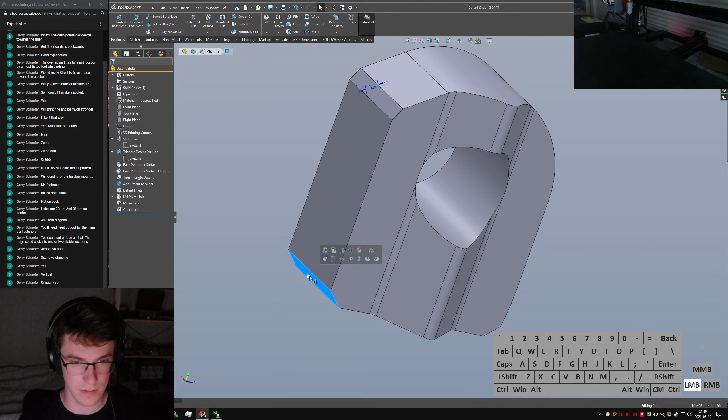Oh, what's the diameter of this? Okay, the spring should still hit on that face, alright. So, well, will it? Yeah. I made those 2mm equivalent diameter, I think. If I measure from there to there, oh, it's 1mm. Yes, 1mm diameter equivalent. So let's do that in here.

Do the same thing over here. That's honestly like 90% of the filleting that needs to be done in this part, is just inside cleaning that area up. And then we should probably take a look at this structure.

So this is the center section cutout. Slider tunnel thin extrude. And we'll call this the slider cavity, actually. Well, no, slider tunnel's fine. Slider tunnel interior fillets. Get these fillets in here. But these guys want to be pretty small, like probably 0.4.

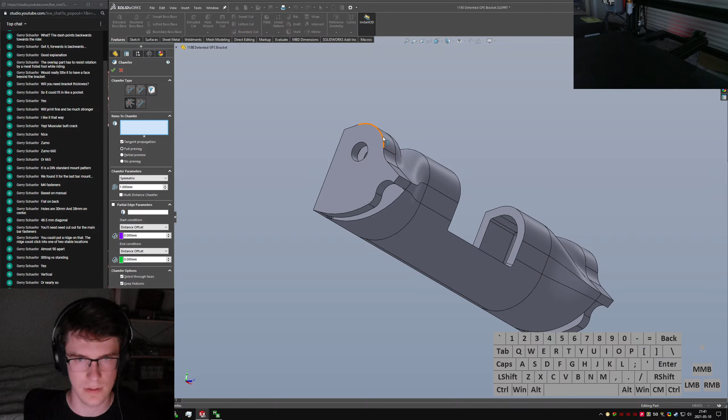Oh, it pitches a fit if we go that way. That's kind of fine though. I like having that, that shape there is fun. What? Oh, it doesn't throw a fit on these ones though, which is kind of nice. Bet we can do that one too. Wow, that's 90% of the way there. I'm gonna add one of these too, or one of these two spots.

Bolt head cutouts on ends. One could hold the other round for nuts. Oh yeah, one could hold the head and then the other, and then it just sticks out the end. Is the fastener long enough for that? I remember thinking it was, we didn't have a lot of spare thread, so this extra 3mm could be hazardous, perhaps.

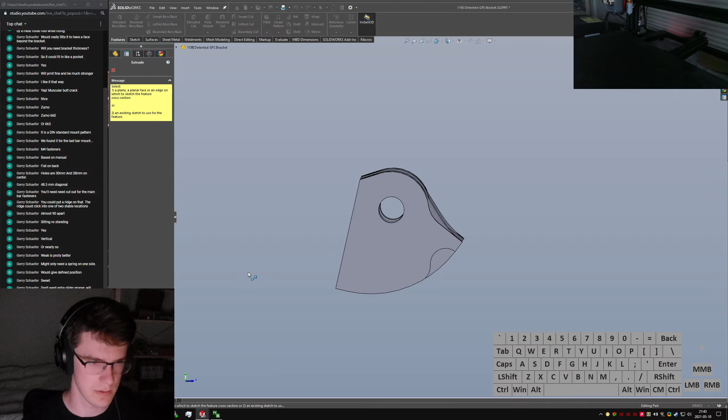Left and right parts, yeah. So like a hex head cutout here. We'll come back here before the fillets. Extruded cut. Let me do the hex cutout first, and then I'll see, make these parallel. And it's an M6.

Dimensions. I guess if it fails, we just drill it out, so. No, that's socket head cap screws. I want hex head cap screws. McMaster, I'm just gonna check McMaster. Hex head cap screw. M6, just give me some numbers.

Head width, 10 mil. Maybe it should be a little bit oversized. Okay, so there's the hex head cutout. And then for the other end, what you're saying is leave it open and circular and large enough that you can get like a socket over it, I assume?

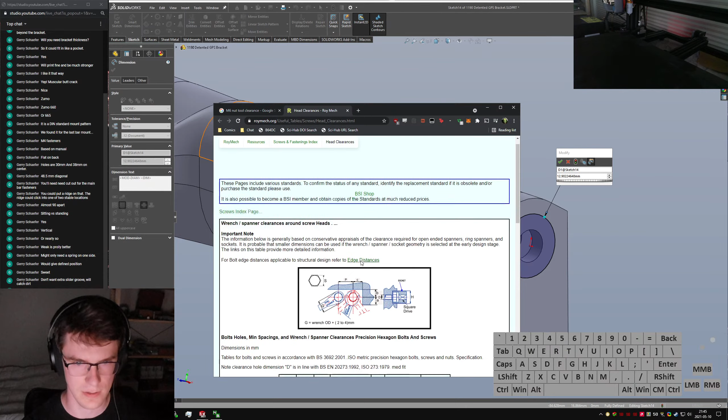Because if so, you're going to have to go measure the diameter of a 10 mil for me. Cool, clearance. Okay, so clearance for socket. Let's see, so those are spanner clearances. That's not what I need. Box end wrench. Yeah, probably, I'll set it to like 14 for now.

And then tell it to do up to surface, up to this surface. And I think I want these... well, no, it's probably better that they come before the fillets. That does look very slick. Okay, what else?

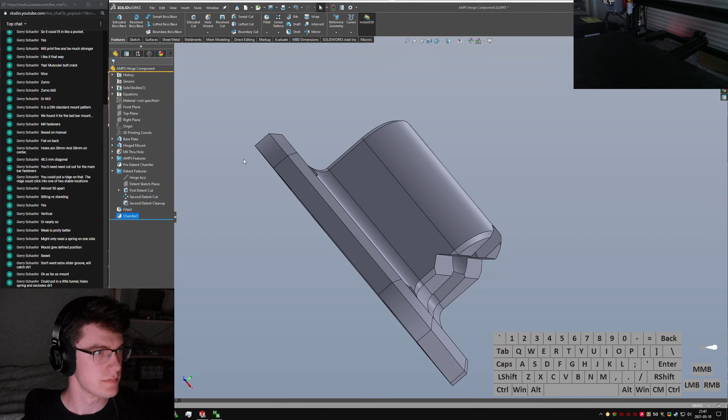So we got our spring with thing, we got our spring detent. I think this model is honestly just, that's pretty much it. It's there, needs a little more chamfer. Yeah, I think this is pretty much there. All these parts are very printable.

We need to figure out a spring for the detent slider. As it is, we've got...

What are we listening to? It's good, but it's very strange. Faded in the Morning by Unknown Mortal Orchestra.

Yeah, I think I can do that. These ones are going to be a while for sure, just because they're kind of large. I really want to know if I've got that clearance right, though. Ooh, and it didn't do that one right. So, hang on. Time to go obsess over some fillets.

Yeah, the detent angles are probably going to need some tweaking, but I mean they were always going to need some tweaking, so I'm not too worried about that.

Can I do both of these at the same time? Nope, cannot. Throws a fit.

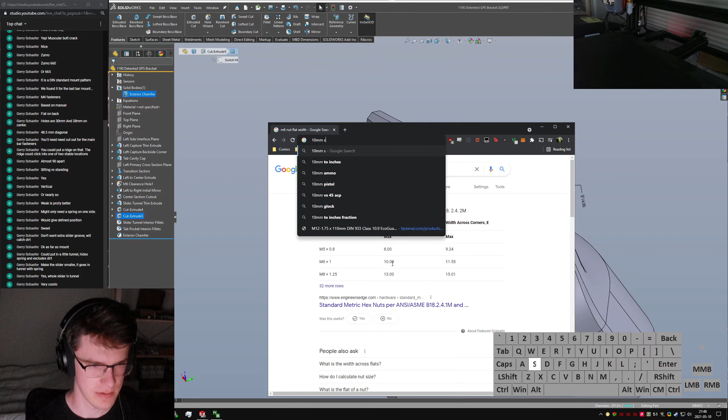I wish I had a 10mm socket handy. Hang on, I could just Google that. I know it's going to be, let's see, M6 nut flat width. Width across flats, 10. 10mm. Okay, this won't be final. Are you sure that you've got enough for it? 10mm socket diameter.

Metric socket outside diameter part. Okay, so if it fails, then it's oh well. Product standard B 12 point D. Here we go. Part number 6. Socket nominal size. Drive end 14.75. So we'll go with 15 on this.

Whoops. Save. Yeah, it's gonna work. Even if it's not the final one, it's gonna work.

And we got plenty of section through the bottom to keep this thing stiff. The whole thing will be compressed together. Oh, this is gonna be so slick. And plenty of space to react that down. I mean, it's not gonna be on the center line, so you're still gonna get some compression across the top, I think, and maybe a little bending. But—

Oh, see if I can sell this idea to Touratech. Do you guys want this overly complicated bracket I designed?

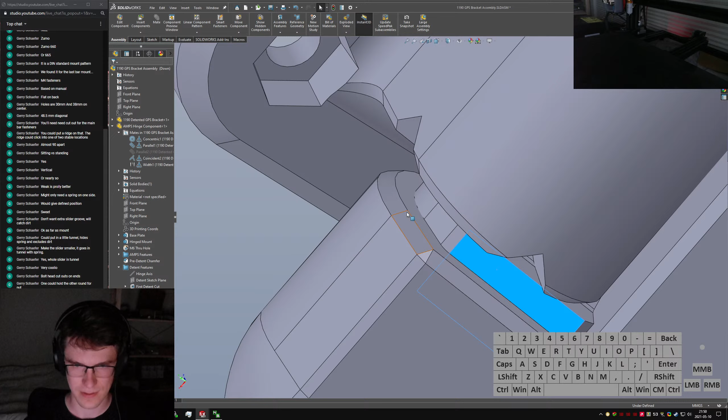Let's come back and do that just before the fillets. So this is the hex head restraint, and this is the nut socket clearance.

We're gonna do a little bit of move face. We only need like probably, well, I'm gonna go with 0.2, flip direction. Give ourselves definite safety.

This is among the nicer things I've ever designed, I think. It's gonna look really slick for sure. It'll be downloaded and appreciated by one person. It'll be worth it.

Okay. Ooh, Next Year by Just Neighbors. Another good song.

See, it threw a fit when I did that one earlier, but it didn't seem to throw a fit with these two. I'm just gonna not think about it too hard.

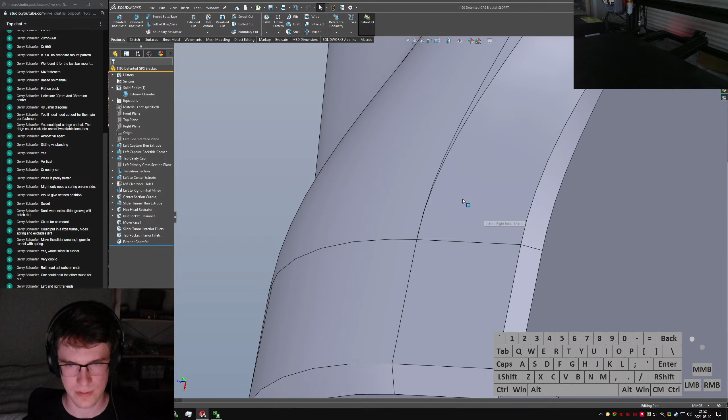Oh, I'm really, really happy with this one. It came out really well.

I'm going to tweak this. Well, nah, I think it's fine to have that big flat face back there. Thought maybe I could make that chamfer bigger, but I'm not sure that improves it.

Okay, let's see, how long have I been going? Wow, almost 2 hours. That's quite a bit longer than I usually do.

I don't think I'm going to stick around and do the sit up on stream, because that's just run-of-the-mill Cura stuff. That's not the interesting part—2 hours from concept in someone's head to pretty close to finished parts.

I mean, obviously these detent angles are going to need some tweaking, but yeah. Talk to you later.

I might be out next weekend for the Best Guess Enduro, maybe. I don't know if you saw that email, but yeah. To all the people watching this when I'm a huge YouTuber someday wondering, what's the Best Guess Enduro? Doesn't matter, you didn't see anything.

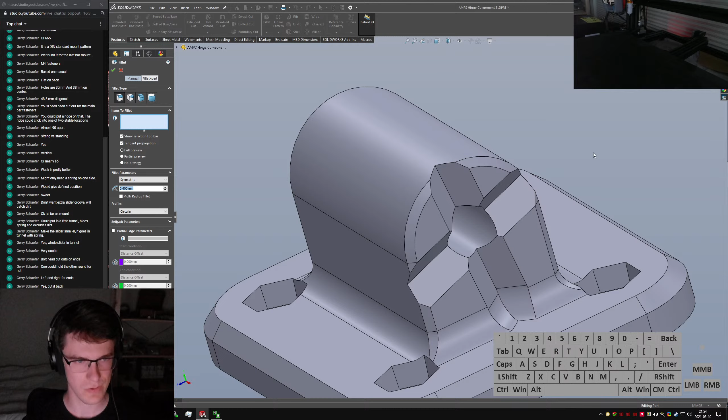What else? Let's call that 0.6, make those match. Can't believe I almost forgot those.

Not the whole face, please. Beautiful. Beautiful, beautiful, beautiful. That's gonna look really nice.

Yep, I'm just gonna go print this now. I just broke some of my mates for some reason. Whoops. Oh, it's because I deleted those edges. I can fix that.

And this guy, instead of being a width mate—hang on. Let's see, I don't want this to be a width mate, I want it to be just butted straight up against it, so it's gonna be back to a standard mate. But it still wants to have a width for some reason.

Whoops. Hang on. This face is going to always be touching this face, so that makes sense. Okay.

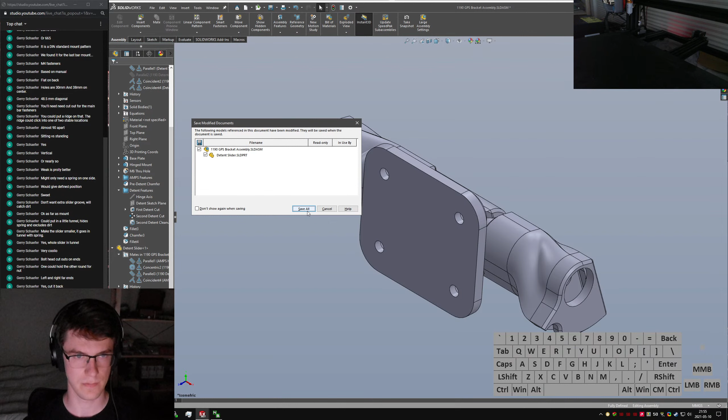Let me just make sure that the up configuration still works. Nope, that one breaks too.

Okay, parallel is broken for some reason. Ah! Coincident. Oh, parallel. Whoops. That's wacky. What?

Okay, I think this guy... Unsuppress. Unsuppress. Unsuppress.

Unsuppress. Make sure, okay, fully defined in this configuration. Fully defined in the down configuration. Looks crazy kick-ass. Okay, now I'm going to print it.